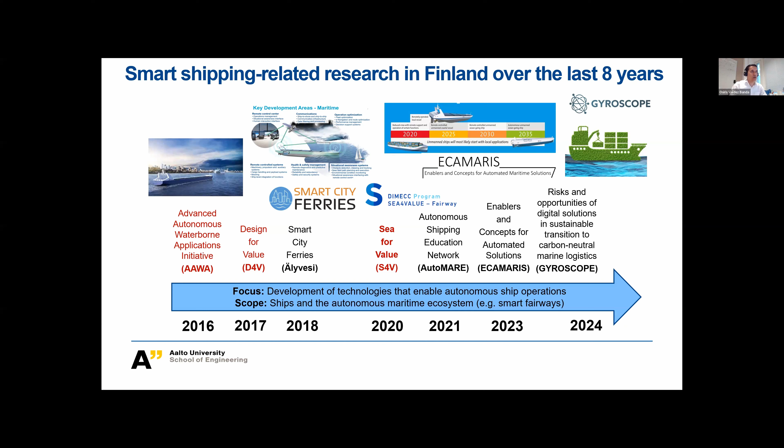So quickly as a background, because I think that's something everybody knows, what is ship pilotage. We know that when the ship arrives in certain areas, either congested or shallow areas, we need to have experienced navigators who can take control and take the ship to the final destination in a safe manner. So these people are quite good experts on the local waters. They go on board the vessel as a pilot, and then provide the guidance and the support for reaching the final destination of the ship.

What is also known from the statistics is that when we have the pilot on board, we have a lower number of accidents, at least on the records. So it's a significant comparison if we think about the accidents of those vessels when we don't have the pilot. So the pilot is a critical task for the last mile of navigation, we can say.

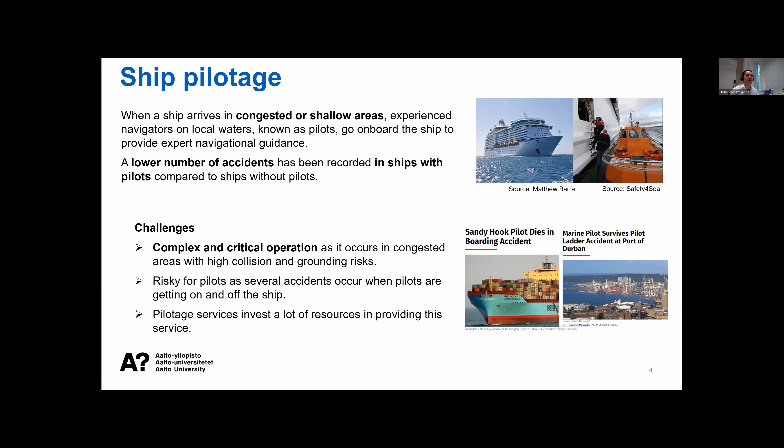So sending the pilot there is already taking and considering some risk embedded in the provision of this service. The pilot service invests a lot of resources in providing this service, so that's also something that is quite important. All this experience and all these resources invested for providing pilotage is something that is significant for balancing there for those vessels who actually require the service.

So what kind of potential, new solution or alternative do we have related to the provision of pilotage? This is basically the remote pilotage concept: instead of the pilot boarding the ship, in remote pilotage the pilot can support the ship crew from a shore control center and provide guidance.

This is very important to mention when people listen to remote pilotage for the first time. It is remote assisted pilotage, not remote controlled, at least not in the case of Finland. It's quite important to notice that the assistance is given from a remote location, but the pilotage is not taking any control of the vessel from a remote control center.

In Finland, we have the Finnish Pilotage Act, which is quite important from the legal side to establish how pilotage is done, and it was amended in 2019 and again in 2023 to allow remote pilotage services in Finland. It's also important to notice that for the 2023 amendment, new risk analyses were determined for critical fairways, particularly those where remote pilotage seems to be an option, but mainly it was the whole analysis of the risks related to the most critical fairways in Finnish sea waters. That's something that we did together with some other authorities.

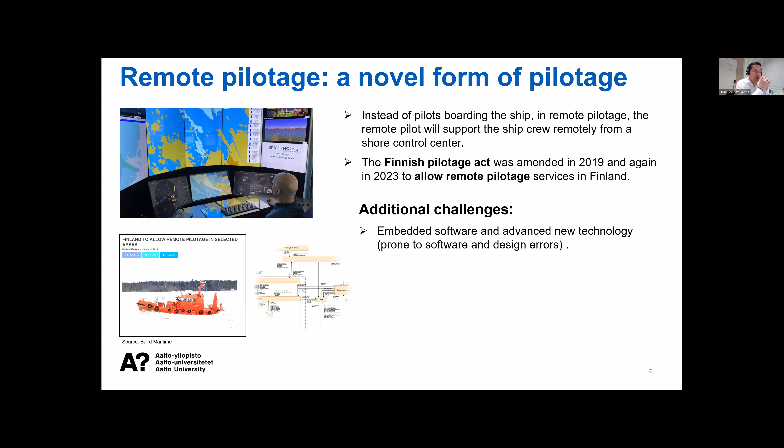So in this case, safety becomes a priority in designing a system that has to be safe by design. For some of the tasks developed by the pilot in a remote location, certain elements of technology need to be assured all the time, because the responsibility has to be properly delegated to this human-machine teaming interaction. As I say, higher numbers of interactions between components can also result in unsafe interactions. So it's very important to understand all this coordination and the interlinks between different elements to find ways of assuring a good allocation and linking of all these components for remote pilotage.

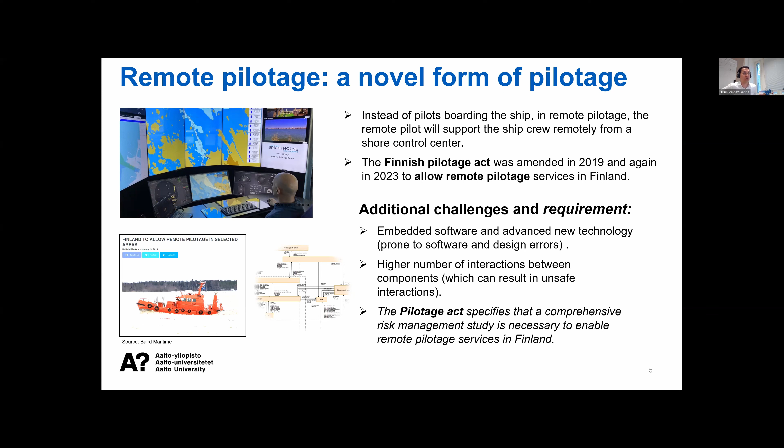By requirement, the Pilotage Act specifies that a comprehensive risk management study is necessary to enable remote pilotage services in Finland. This risk management study refers to analysis of risks on the fairways where this can be provided, but also analyzing the risks in the initial aspects of designing remote pilotage as a service. And then, of course, this could continue when the service is developed or implemented.

So how did we do it in this Sea4Value project? We basically used the structure of the formal safety assessment. Perhaps many of you are already familiar with this process, which starts with the system description, continues with the risk analysis, elaboration of risk control options, assessing the costs and benefits obtained from the risk control options you implement, and then finally a safety management or risk management strategy is documented and provided for the responsible parties and the final end users of remote pilotage.

However, when running this formal safety assessment, especially for advanced systems like remote pilotage, we started to figure out that there are some limitations, so we need to do more than just follow the process of the FSA. We need to develop some specific elements.

So particularly in this development of the description of the concept of operations, to understand what are the system components and how they will function. That was something that we developed together with the pilots in a very extensive task that I will show quite quickly. We conduct the risk management of remote pilotage as such on the service, on what are the components and the interactions and the process for remote pilotage that we analyze.

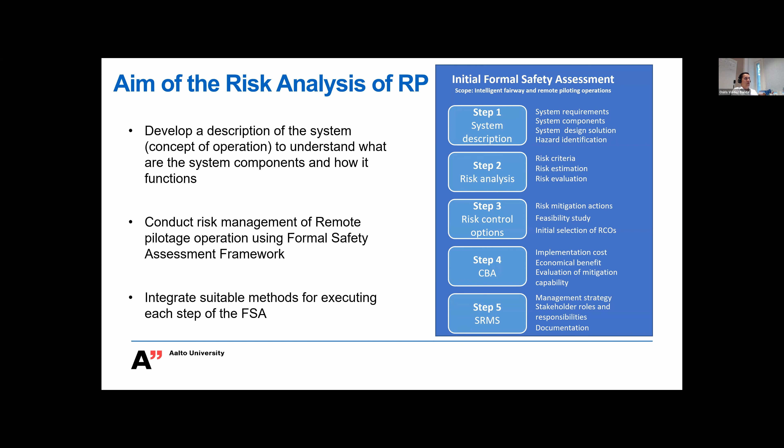And then we also made this kind of integration of different suitable methods for risk analysis, for modeling this, for describing or representing the models, to discuss the models and represent how the operations will be executed. That's something that we also need to elaborate a little bit more on. So particularly, I will say that for the remote pilotage system description and the elaboration of the initial CONOPS, we need to do a lot of tasks, a lot of work for concluding this first step.

And actually, the challenge starts already by noticing that, for example, in the FSA, step 1 or 0, as I call it sometimes, the goal is called system definition. There are no alternatives explicitly offered for making this type of description, especially when it's something that is entirely new. So we have some issues on that, and this is also referred to in other studies where the FSA has been criticized for being a little bit ambiguous in the elaboration of the system description.

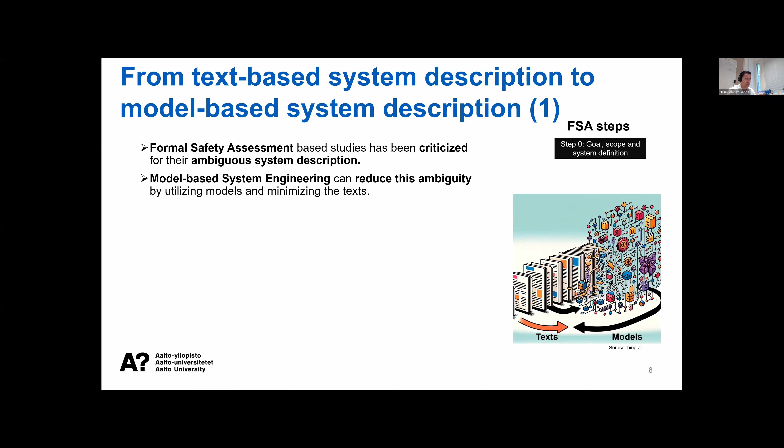So that's why we started to look into model-based systems engineering as a solution to reduce this ambiguity, utilizing models to minimize text and have a model representation that can be discussed with different stakeholders related to remote pilotage, or people interested in developing this risk management strategy. So for us, we have the challenge to think about that. Okay, model-based engineering is a solution, but what kind of tool can we utilize for that?

So we need to start to look for those methods, and the suitability of those methods will depend on different elements. Of course, the first is the system scope: what is the system to be considered, and how complex will it be? And then the purpose of the modeling: why we are modeling this, for what purpose the model will be used. In our case, it was for elaborating the risk analysis and setting the basis for the initial risk management strategy.

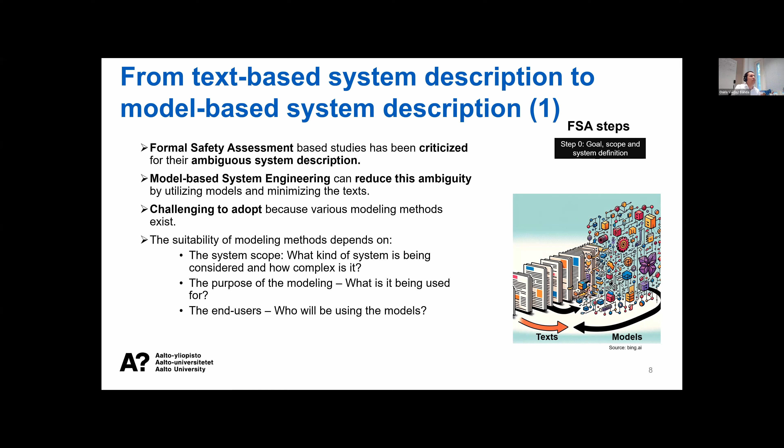And then, of course, this cannot just be embedded into the people who research risks related to remote pilotage, but actually everybody on board in current pilotage was also considered in the discussions for elaborating this type of description and looking for the most suitable alternative for modeling the system. So for that, we call it a decision-making framework for selecting a suitable modeling language in this model-based engineering.

So end users in remote pilotage were entirely taken on board in this discussion, trying to test different alternatives, following this framework to see what is the most suitable option. Different comparisons were also developed for the existing alternatives. And depending on the usability and understanding of these end users, we started to look at which seems to be the most suitable alternative for us.

The tool that we decided on at the end was SysML, the systems modeling language, because it offers a more adequate capability, and also allowed this representation in a way that, in our case, the pilots and the people related to current pilotage can actually see the modifications that may come from migrating from current pilotage to remote pilotage and the elements that have to be done there.

So together with different end users, not only pilots, but also different authorities and technology developers, we started to make this description of diagrams related to remote pilotage, where we have all the descriptions related to the components of remote pilotage. You can see some of the main labels here: shore control center components, ship components, fairway components, and others.

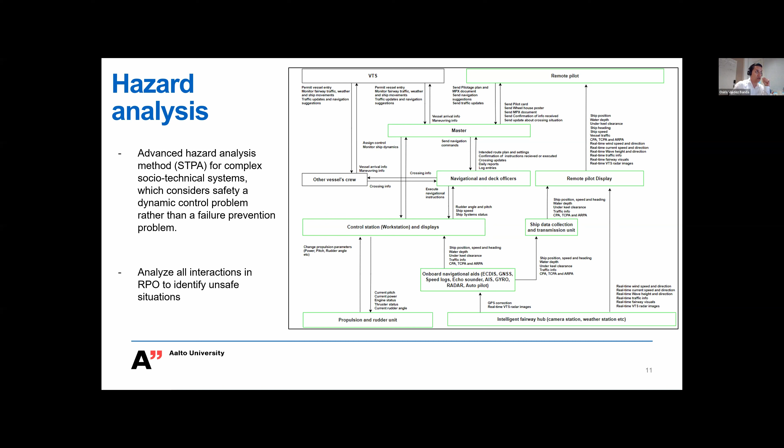I just need to say that the figure I'm showing here is a kind of synthesis or a very minor representation of a whole model that we have somewhere else. But if I show you the whole model, it's very problematic to have a proper display of that. But I will show you at the end where you can find all the details that you can see here, including the whole description of the model.

So then when we start to look at the hazard analysis, at least for this initial risk analysis, so for the first time that we are making the risk analysis for remote pilotage, we just consider this type of losses, and you can see it here.

It focuses on injury to people, loss of or damage to ship and cargo, loss of or damage to external objects, loss of the mission, effects on the environment, and of course, things related to customer satisfaction related to the provision of the service. Five system-level hazards were considered for this analysis.

Then the focus on the pilotage operation: basically the ship violates the minimum separation standards, which is quite a critical aspect in maritime navigation here in Finland. Hazard number 2, the ship doesn't maintain a safe under-keel clearance. The ship leaves the designated route, lack of communication initiation between the remote pilotage stakeholders during the execution of the service, and the lack of information sharing between remote pilotage stakeholders during the remote pilotage service.

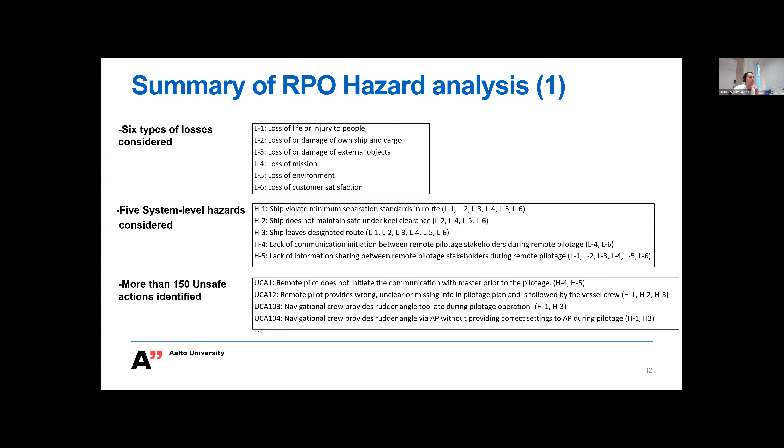That's something that we basically determine as system-level hazards, and we link them to the losses that you can see on the top. Once we start to determine these hazards, we start to identify what we call unsafe control actions. So how these unsafe control actions can lead to the hazard, then actually going to the loss or to having an accident. So there are around 150 unsafe control actions that we identified. You can see some of them as an example there.

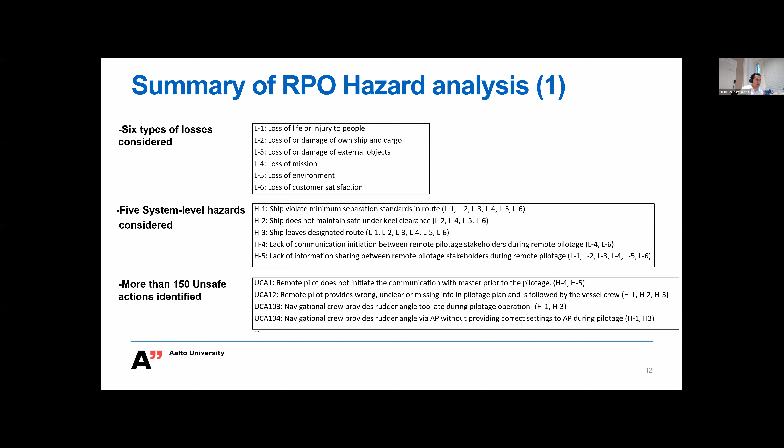So remote pilot does not initiate communication with the master prior to the pilotage. Going to things related to navigational crew provides a rudder angle too late during pilotage operation, going more into the specific issues executing the operation that can actually endanger the execution of remote pilotage. So it's a very long list. I don't remember the exact number, but more than 150 unsafe control actions that we identified there.

Then combining these unsafe control actions and the hazards and losses, we created more than 800 unsafe scenarios that were identified. And we started to categorize or group those into 3 major categories and more than 15 subcategories. Category number 1 was the issues related to hardware and software, mainly critical for remote pilotage. The issues related to human factors, and then the issues related to incomplete, incorrect, unclear, or lack of data. Data transmission is also very important for the provision of this kind of remote pilotage.

Well, the database recorded all the issues, and the interconnection among these unsafe scenarios and the losses, the hazards, and the unsafe control actions; everything is interlinked in a database or in a model that we also created. So, going into specific things related to what was analyzed there, we analyzed safety or risk related issues linked to the equipment. You can see actually the equipment that was considered for the analysis on this part.

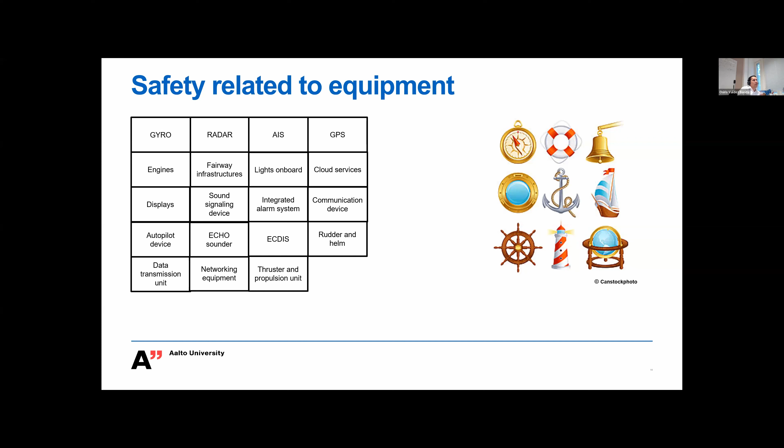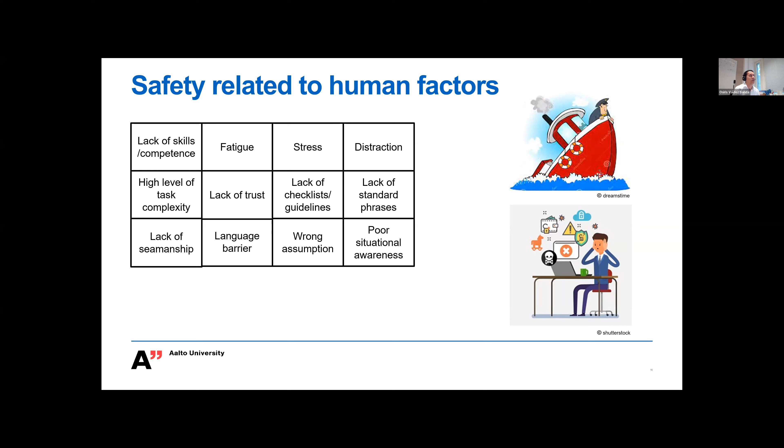But just as an example for you, when we start to look into safety-related human factors and the main factors or issues that are listed there in this square, we start to look into this lack of skills and competence.

So everything related to skills related to remote pilotage, what are the navigational suggestions, the pilotage planning, establishing connection and sending information, suggesting emergency procedures, communication skills, situational awareness, and handling of the new equipment or the current equipment was also analyzed for that.

Skills related to master and navigation crew, vessel navigation, communication skills, executing emergency procedures, etc. So everything that is relevant for the competence and knowledge of pilotage that we believe at this initial stage is critical for remote pilotage was included there. And then we started to link it with the control actions that we started to determine, or these risk control measures that we started to list there.

So how to properly make the selection of the ship and fairway. Simulation practices for remote pilotage was an initiative included there. The demands for the experience and the skills needed for the pilot given the remote pilotage. The backup or duplication, or the way of assuring the communication can be guaranteed at all times, especially with the new systems and new components added for remote pilotage.

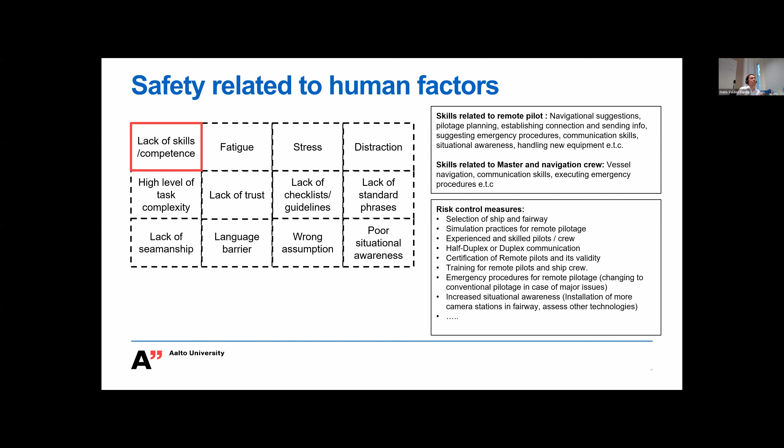We also discussed the aspects needed for having the certification of remote pilotage and its validity, the training needed for the pilots, what kind of emergency procedures can be run in the case of an issue during remote pilotage, and then things related to new systems like how to increase the situational awareness and how to make proper utilization of sensors, cameras, and stations, and everything related to the technology embedded on these smart fairways and the technological aspects needed for remote pilotage. This is something that we also included there.

Then we started to create our risk matrix and create a description and allocation of the risk level for each category that we designated there. As you can see, in low risk level, there are 18 categories. 9 categories are related to the medium risk level, and then 22 categories are allocated to high risk level.

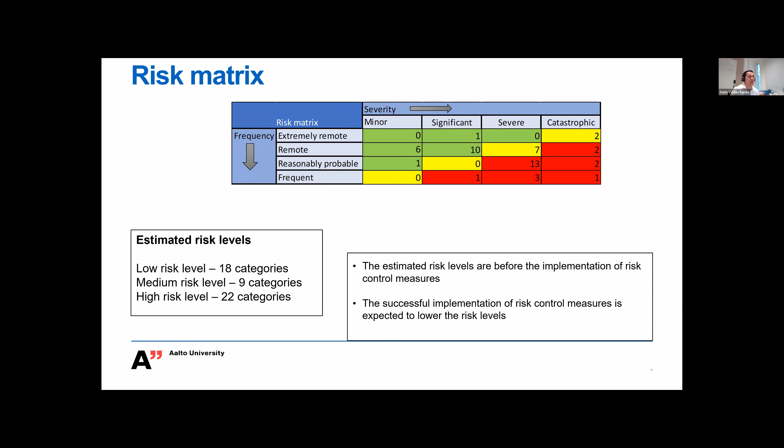These risk categories are before the implementation of risk control measures during remote pilotage, and the success of the implementation will be tested against new control actions that will be executed to test how efficiently we can actually decrease the risk identified in this matrix. So once we identified these categories and potential risk control options, for the determined risk control options, we did this cost benefit analysis on the risk control measures that we allocated there.

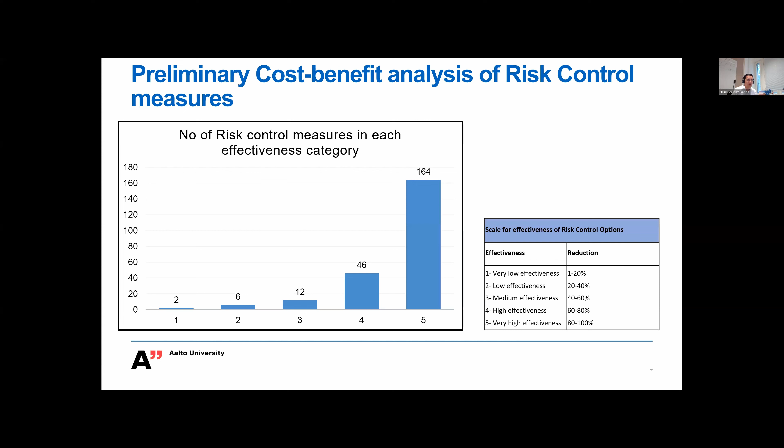For everything we allocated there, we see that regarding the expected effectiveness of risk reduction from the risk control measures that we utilize, 164 seem to be understood by the end users as having potential to be very highly effective for reducing the risk. And only 2 of them were in the rank of very low effectiveness expectation from the risk control measures.

Then when it comes to the costs, we also tried to balance and make a preliminary analysis on how costly the implementation of these categories and the risk control measures embedded into them will be. So some of them were mentioned as not having any expectation of significant cost or no cost at all. Low cost around 70, 51 with average cost, high cost 54. And of course, very high cost was only determined for 2 categories.

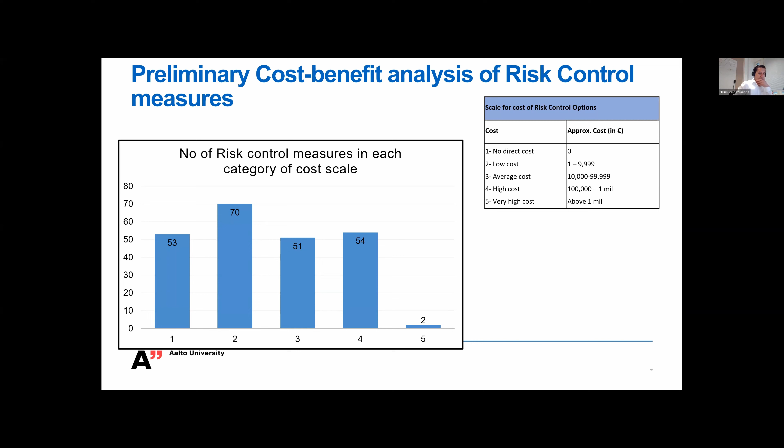Then of course, once you have these risk control measures and actions, for us it was very interesting to know which combination seems to be the most adequate or the most promising to reduce the risk while also balancing the resources that you need to invest, particularly the financial aspects. So we created a model, we call it the influence diagram of remote pilotage operation, with the idea to test different risk control measures against the expected effectiveness, plus the expected cost, and then try to balance which is the most promising combination.

The diagram is focused on critical risk nodes and can estimate the total expected benefit by calculating the benefit due to risk reduction and the cost of implementation.

And what I can say quickly in general terms about this model is that the important measures in the selected risk control options that seem to be more adequate, or seem to have the highest potential to reduce risk while also having less impact on the use of resources, were the redundancy of data collection and transmission units, a standardization of language utilized for assisting or providing the remote pilotage, and some specific requirements such as certification and the minimum crew size required for remote pilotage. Those were some of the measures that seem to be the most promising in terms of combination and in terms of the capability to reduce the risk.

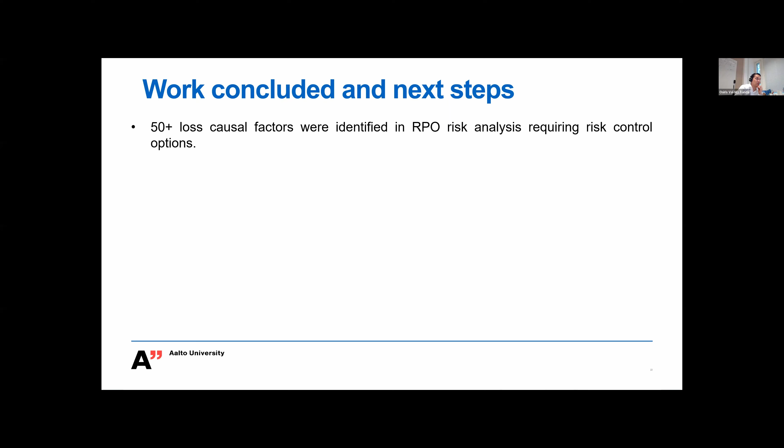So when it comes to determining specific recommendations and allocation of critical aspects from this analysis, what we provide now is more than 50 loss causal factors identified for remote pilotage operations, and tests of particular ways of controlling the risks, evaluating their effectiveness and cost. The risk management strategy defined with these risk control actions is going to be used, and this is something that's already happening, as the foundation for the definition of a structured management system that can continue the design and the future operation of remote pilotage in Finland.

This is very important because our analysis makes a lot of distinctions and a lot of focus on the context where remote pilotage is going to be developed or executed in the Finnish case. So basically here in Finland, aligned to this focus on the risk analysis of remote pilotage, as I mentioned at the beginning, we have done some critical analysis of demands and risks embedded in the navigation of critical fairways, the most important fairways for Finland. This is something that we have done in a parallel project without much focus on remote pilotage, but of course the main outcomes of this analysis will guide or determine the specific requirements that need to be embedded in this remote pilotage operation. The output of this work supports the definition of safety requirements related to remote pilotage.

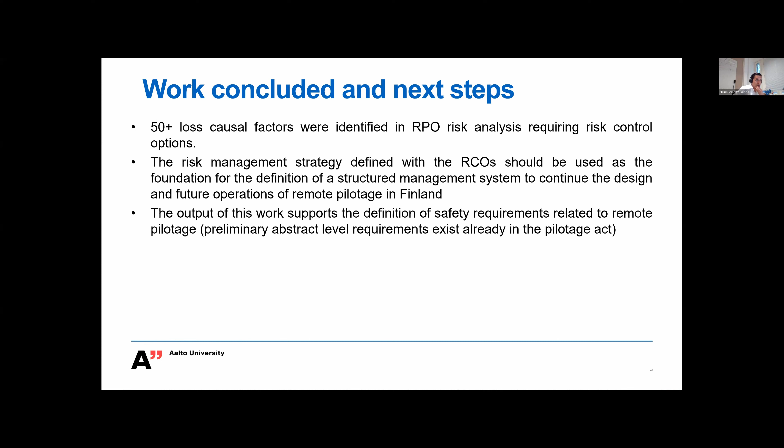Preliminary high-level requirements exist already in the Pilotage Act, but when it comes to specifications related to remote pilotage, I think now with all the information that we allocate here, it's quite constructed and it provides a rich level of information to continue to determine all potential final requirements that may come by regulation or from the operational side when the service is provided. We basically had the demonstration of remote pilotage in 2022.

And of course, it was very good for us to test some of the results and also to influence some of the aspects needed for a successful demonstration case in 2022. So some of the information provided from this risk analysis was already embedded in the setup of the aspects needed for this demonstration, either on the fairways or in the remote pilot center, and also for the people on board when they knew that they were going to be remote piloted. So different aspects were available there for this task.

For the next iterations on the continuation of this work, the scope of the analysis should be expanded to a higher level. As I say, we have a lot of focus on the pilots as such, but we already started some discussions with the Finnish Transport and Communications Agency and the Finnish Transport Agency related to safety aspects.

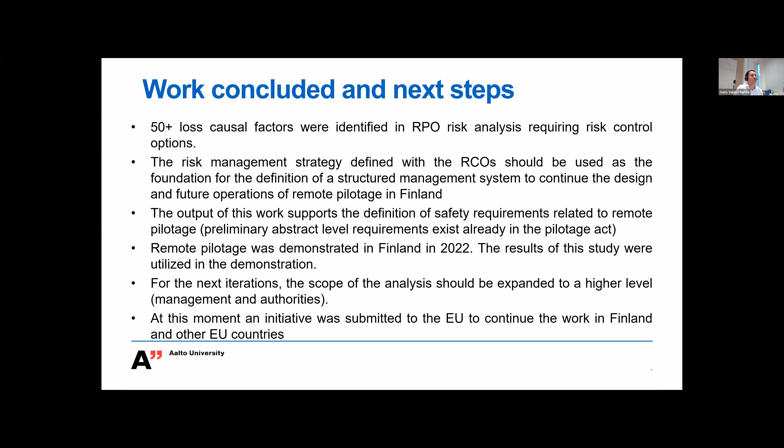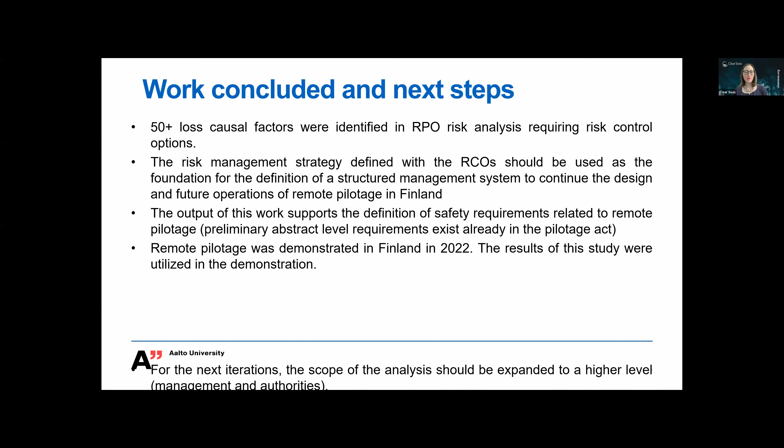Thank you so much. That was a great overview of the process involved. I'm sure there'll be lots of questions, but I wanted to start with, where did the impetus for this risk assessment come from? Who identified the need for this project?

Well, the main interest comes from the pilots as such, so here in Finland it is Finnpilot. And of course, it is embedded into the actualization of this Pilotage Act. We require the risk assessment by rule, and this is determined by, for example, the Finnish Transport Agency and the Finnish Transport and Communications Agency, which are responsible for maritime safety in Finland. So it's a demand coming from that side, and for remote pilotage, these risk-based decisions have to be properly done to fulfill the demands coming from the authorities. And that was coming out of the modifications to the Pilotage Act that happened in 2019 and 2023? Yes.

Just a last question to wrap up. I want to go back to the start of your presentation where you raised that one of the main risks to pilots themselves is the physical risk of transferring to and from a vessel. And there have been a number of injuries and deaths associated with that transfer. Based on that, how did you find that the pilots reacted to the idea of remote pilotage and the demonstration project that you did to demonstrate pilotage as a remote operation?

Yeah, that's a question I get almost all the time when I'm presenting this, either by curiosity on the facts of reducing the risk, or also by the acceptability of the pilots knowing that remote pilotage is coming. And I say that in Finland, the pilots have been very positive and have always been on board this analysis, on board of the development of this work, because I think they also realize that remote pilotage brings new opportunities for them. So it makes some potential positive changes for the execution of the work.

And I think at least from the perspective that we have and the involvement of the pilots here in Finland, everything has been quite well received by the pilots here and all the local cluster of pilots in Finland. This is something I discussed, for example, with colleagues in Greece, where they say that these kinds of talks cannot be done, or these kinds of ideas can have a very negative reception there. But I think here the pilots look at it more as an opportunity for further developing their profiles and enhancing the way that the service is provided, and the opportunities they will have for a safer working place.